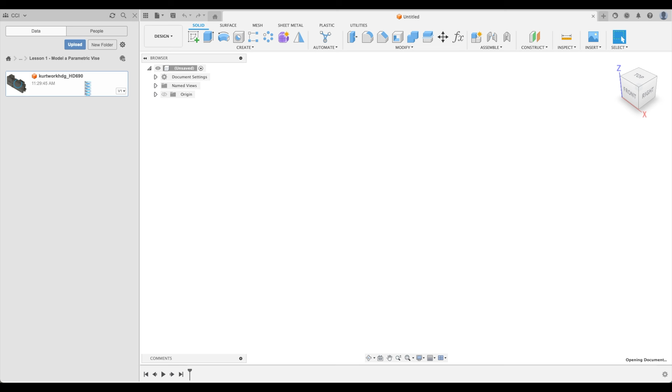So now that our vise has been uploaded, we have opened it. We can see that it is bare bones. Here is our vise—there's no texture, there's no appearance, and actually the orientation is wrong as well. Don't worry about that, we're going to address all of those in a little bit.

One thing you should pay special attention to: with our main assembly, if we right click, make sure to not capture design history. This is fundamental whenever we upload a file and do a ton of work to it, especially a vise like this—we actually don't want to capture the design history. Why not? Well, picture all the different adjustments we're going to make to this vise. If in the future we want to use it in a different program, a different file, a different setup, we would have a timeline with so many different types of adjustments to it. We would input that timeline into our new file and it would just get more complicated. It would actually chew up more of your processing power as well.

So we want to mitigate that. We want to keep as few items as possible in our timeline, and one way to do that is to not capture the design history. The next thing you'll notice is that all of our parts for our vise are located in the subassembly right here. And there we have it—everything is right there. Let me just rotate our vise.

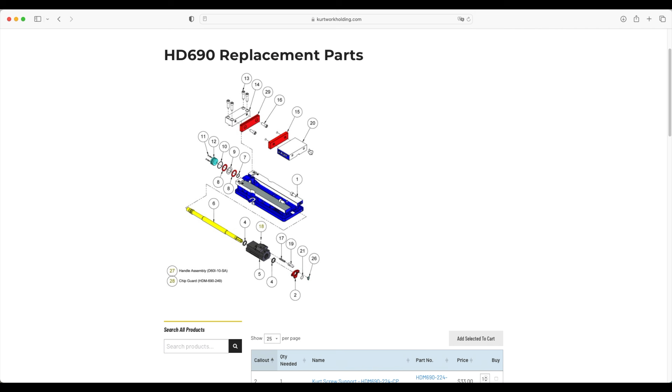Now we're actually going to have 2 more parts. What are they? We're going to have the 3 main ones, and then just our jaws, 15 and 29, which are our jaw plate and our groove lock jaw plate. Why are we going to have these jaws off to the side? Well, in the future, we might want to use aluminum jaws, or some other type of jaw system that comes from Kurt. So we're going to put those as their own individual components that we can easily adjust, change, or hide in the future. So total, we will have 3 main and 2 sub.

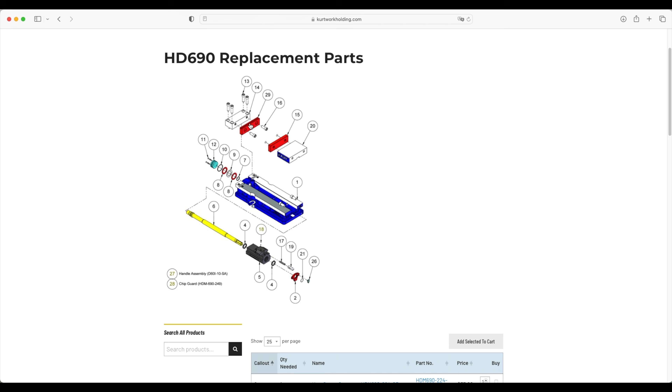So let's go back to Fusion. In our main assembly, we are going to create those components. New component - we're going to call this vise. The second component we will call stationary jaw. The last one will be our movable jaw. And then we will have our 2 individual jaws - new component, groove lock jaw plate, and jaw plate. So there we have it, 1, 2, 3, 4, 5. And then we have our master assembly, which now we are going to adjust.

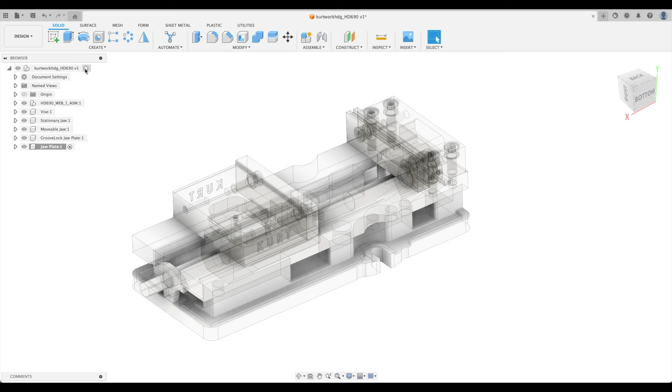So let's go back to our main assembly here and activate that. We'll expand our contents of our subassembly of the vise itself. Now, one thing with Kurt I've noticed is an error - they've actually given us 2 groove lock jaw plates. As we click on one, we can see it here. Let's hide it. And then we have another jaw right up here. So we actually have 2 jaws in one.

So let's delete the second one. We don't need that. And we'll take this first one and drag it into our groove lock jaw plate. There we go. Let's do the same thing with our jaw plate over here. We're going to drag it right down there. Let's hide those both now.

Great. So now let's look at our stationary jaw. Here we have the stationary jaw and 6 socket head cap screws. Let's find them and bring them over into our stationary jaw assembly. A little secret here - once we move it, we can hide our stationary jaw component and it will hide it on our screen as well.

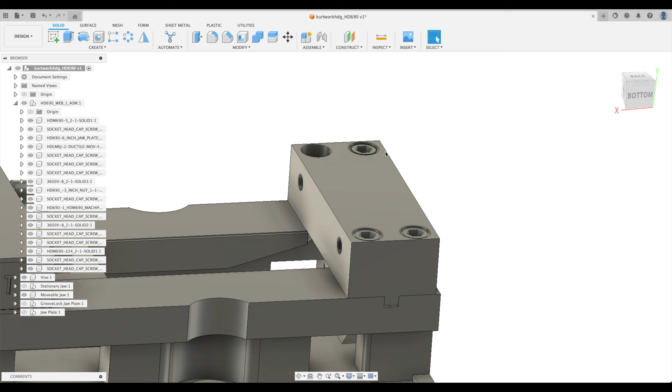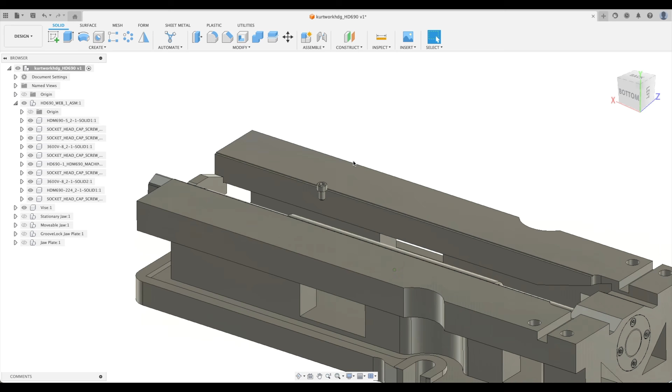And then our stationary jaw itself - let's move that into there. Perfect. Let's do the same thing with our movable jaw. This little screw that's left over, it's hidden. We don't really care about it, so we're just going to delete it.

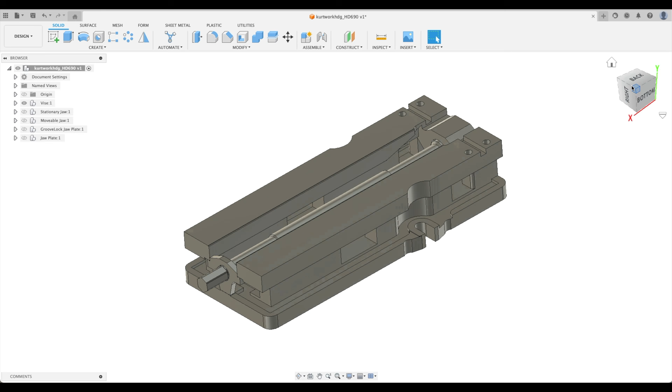Now, everything else that we see here is all going to be part of the vise assembly. So let's just grab all of that and drag and drop into vise. And we can delete that main assembly that came with the file from Kurt. Great. So now we can view our stationary jaw, our movable jaw, our groove jaw plate, and our jaw plate.

So before we go on to doing our parametric modeling, we have to join these bodies together. Let's just take a look at our stationary jaw, for instance. Here we have how many different bodies? We have 7. And if we open up our assembly, there they are. Well, we would like to combine all of these into one body, and the reason for that is we want to keep our future part as simple as possible.

When we import our vise into any future operations or any different files or projects, we want to have them inserted as quickly as possible. We want it to have an easy load on our processor, and we want to have things simple. And we don't need to have all these bodies as well. Remember, we're trying to keep this as simple as possible.

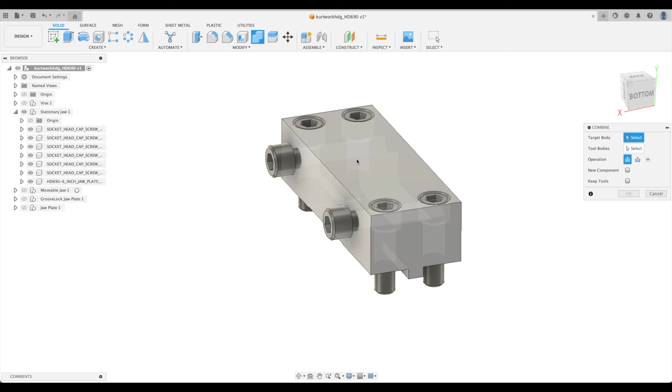So let's combine everything. We're going to combine our target body with all of our tool bodies. Go OK. Now we should only have one body right here. We can drag that and drop it into our main component, stationary jaw, and then delete everything else. So our stationary jaw is here now, and it is actually only one body. That's perfect. Let's hide that.

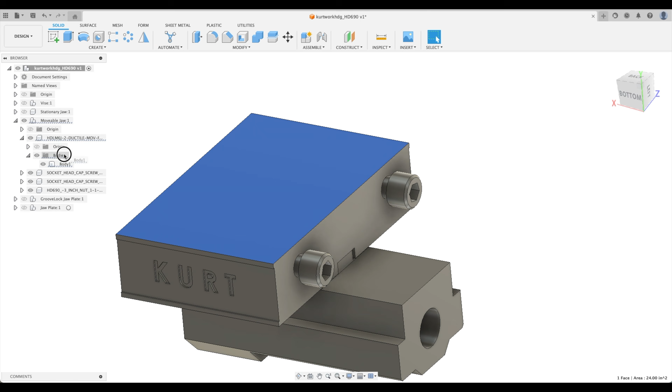Let's do the same thing for our movable jaw. Again, we are going to combine as one body, and then we're going to click on our body that we want to keep. And there it is right there. We can follow the dotted lines to where we find it, drag and drop it into our main component, and then delete all those subcomponents which have no bodies in them. Remember, we've combined them already. There we go. So now our movable jaw is only one component.

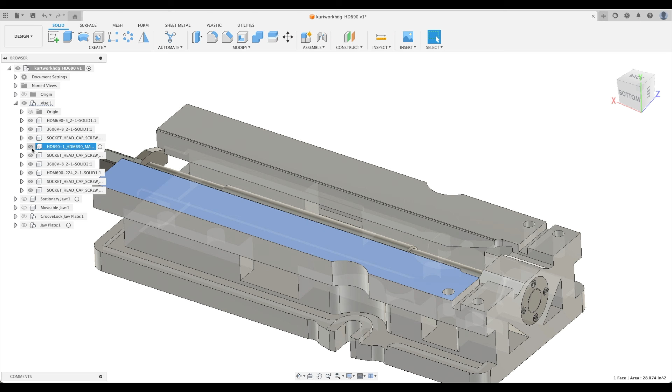Let's do the same thing with our vise now. So this is a little bit more complicated, but let's just take it one step at a time. Let's hide our main vise right there, and then we'll start joining everything together here. Let's do that - combine. Can do that. Now we can combine this as well and hide it at this point.

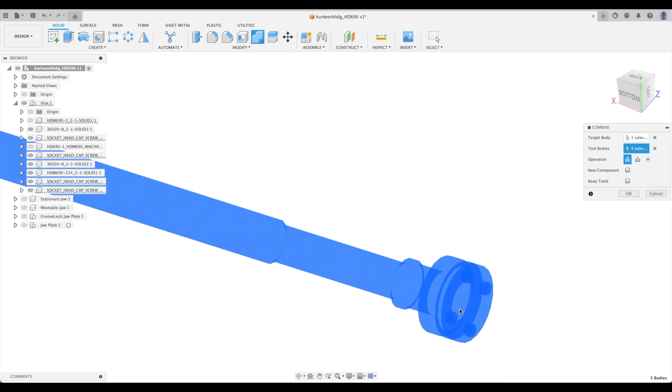Select our screws. We can even delete the screws if we want—they don't really have to be there in our part file. And then this actually does not join to our part right here, and the reason is there's a little bit of room in between those two components.

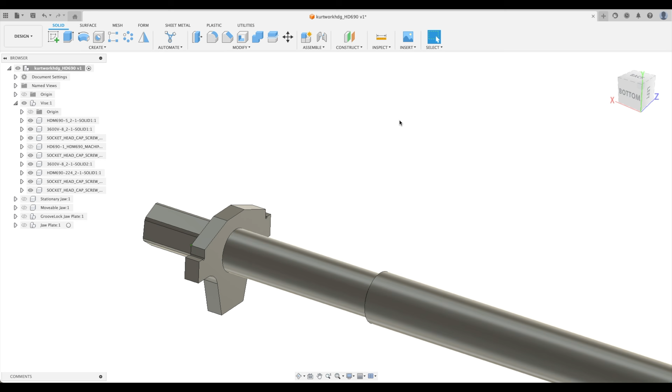Let's make our main vise active, and now we can combine our target body with our tool as well. So now everything should be under this one body right there, and we can drag and drop it into the vise and delete everything else.

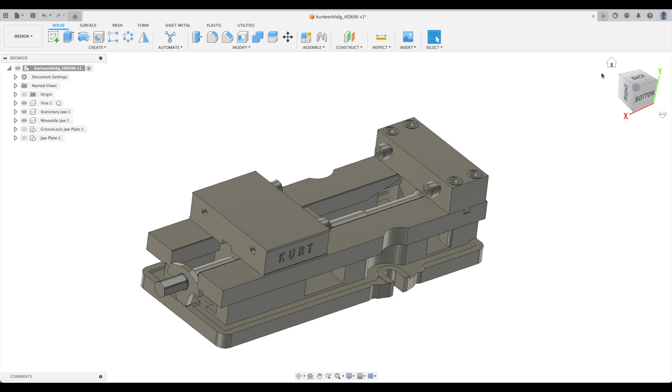Perfect. So now everything under vise only has one body. Everything under stationary jaw has only one body, and everything under movable jaw only has one body. So now we can move on to parametric modeling.

We're going to go up to our master assembly here and capture design history. Now our timeline shows up on the bottom. So the first thing that we're going to do is orient our vise. How can we do that? Well, let's just join it. We're going to click on that, go to our origin. There we go, and rotate it.

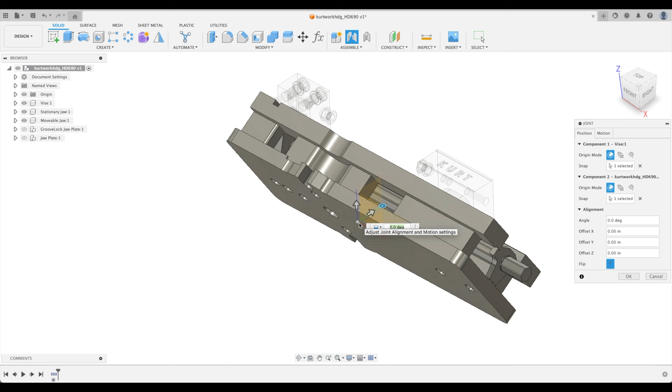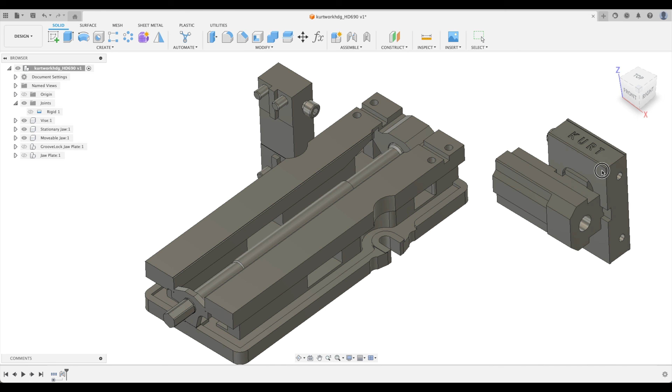I'm going to rotate it 90 degrees. This is going to be the direction that I am going to—when I insert this vise into a project, it will orient it just like you see on the screen. So let's go OK, and we can hide that origin and the joint. Now we have our stationary and our movable jaw. We have our vise, which we can't move—that is locked, that is joined to our origin. And then we have our GrooveLock jaw plate and our jaw plate right there.

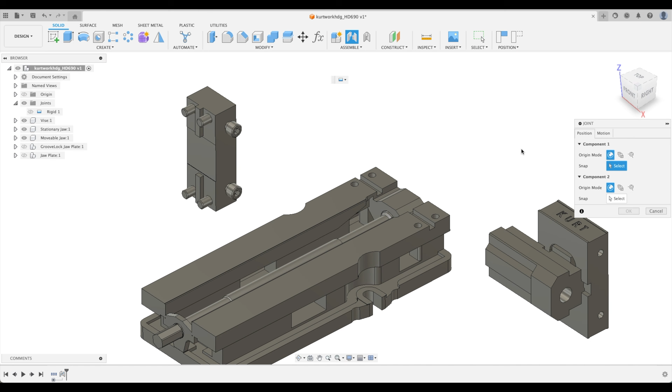So let's first of all join our stationary jaw to our vise. How can we do that? Remember with joints that the rule applies this way: this to that, this to that. So we want to move this, which is our stationary jaw, to that, which is our vise. We don't want to select our vise and move it to our stationary jaw—that would move everything over and fix it to this orientation. No, we want to move the stationary jaw to our vise.

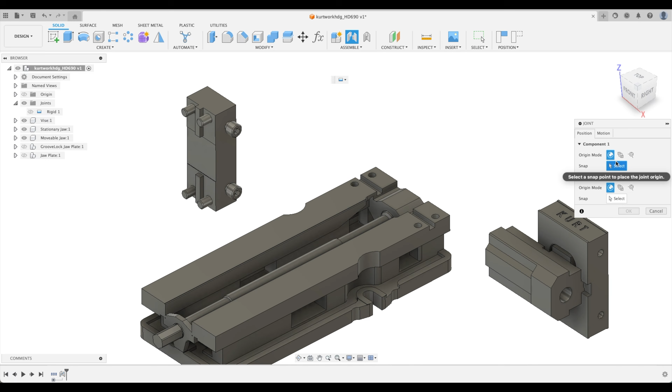So best way to do this, let's pick between two faces, and we are going to select this face and that face, and then we're going to snap it to this point right there. Now we're going to select our component number 2 and do the exact same thing: 1, 2, and snap it right to there. So now we just have to adjust our angle—we're going to go to 0. There we go, our stationary jaw is now in place, and we can hide that joint as well.

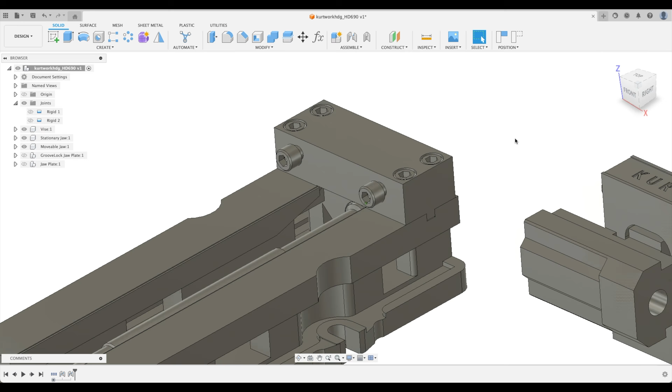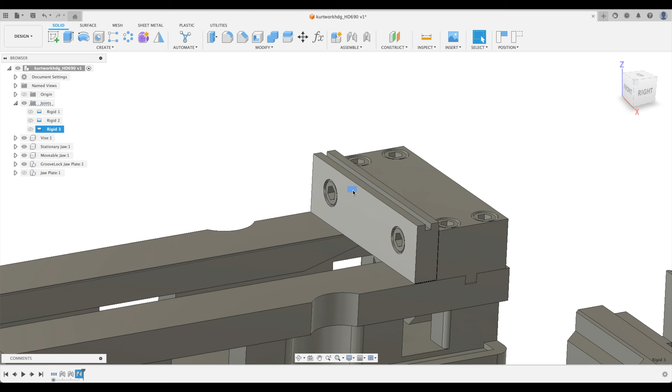The shortcut is select the joint and press V. Great, now let's put our groove lock jaw plate there as well. So we can join this as a rigid joint. Perfect, there we have it. We can hide that joint as well. Now next, let's put our jaw plate and join it to our movable jaw.

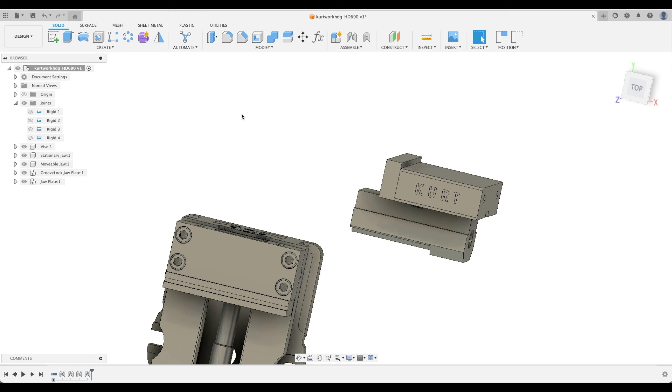Perfect. Now we can join everything together. So let's hide that joint there, and we can join the bottom of that jaw to the bottom of this, rotate it to 180, and it should be perfect. There we have it. So now our vise is completely constrained, it's assembled.

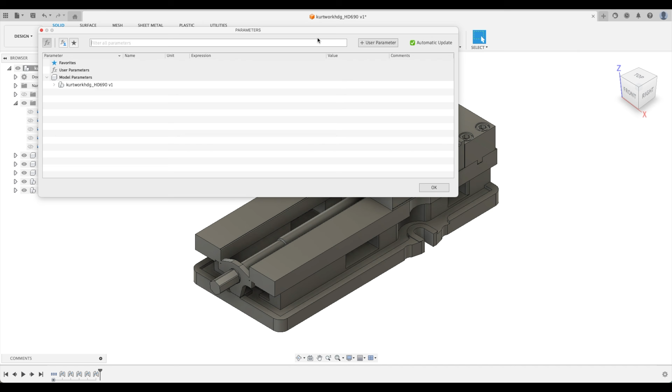Now we can do our parametric modeling. So for our parametric modeling, we're going to open up our parameters, and let's create a bunch of parameters here. So we're going to have stock X, and let's just make up a random dimension—this will be adjusted according to what your stock will be in future projects. So let's just say it's going to be 6 inches, and we'll get a better understanding in a little bit of what this actually means. So enter. Let's create stock Y, and let's do 4 inches. And let's do another one, stock Z, and we'll call this 2 inches.

Great, now we're also going to have an offset value. So the stock is going to be centered right in the center of our jaws, but say we want to move our stock over to one side or to the other. So let's just call this stock offset, and we're going to put it at—let's go 1 inch right now. This will change in the future. And then one last thing we're going to do is we're going to create parallels. So we're going to call it parallel depth, and usually they're 1/8 of an inch. Let's call it parallel thickness.

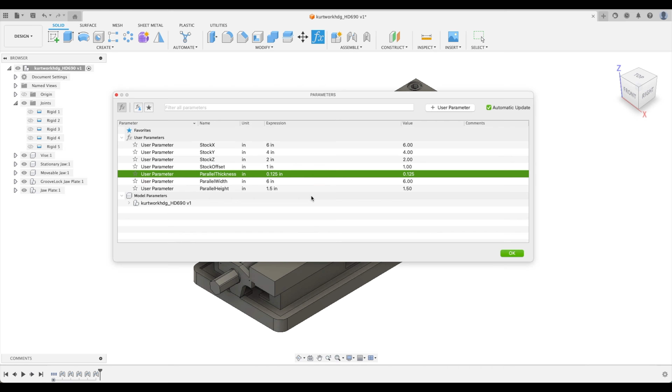And then parallel width. Standard parallels are 6 inches wide. And then we're going to do parallel height. Let's stick with 1.5 inches right now. So you should have all of these parameters before we proceed, so give yourself an opportunity to pause and input these parameters into your system.

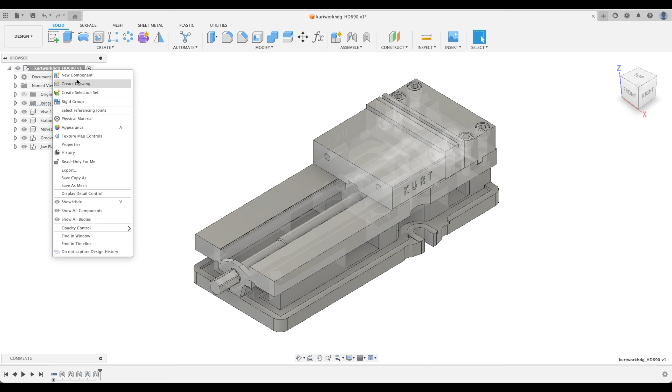So what do we need to create right now? We need to actually create 2 more components. One component is going to be our stock, and the second component is going to be our parallels.

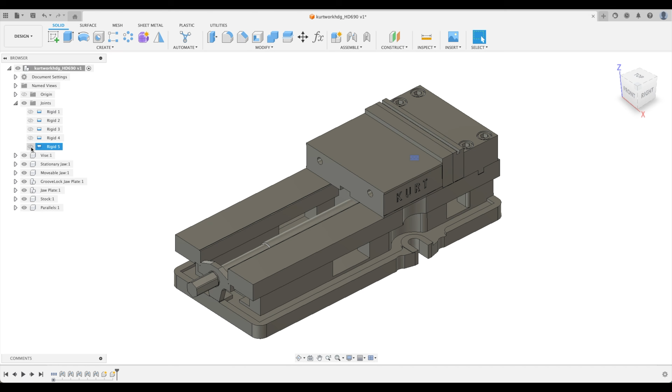So let's go back, activate our main assembly. One thing we want to do right now is find our joint that we just created to join those two together, and we're going to adjust this here.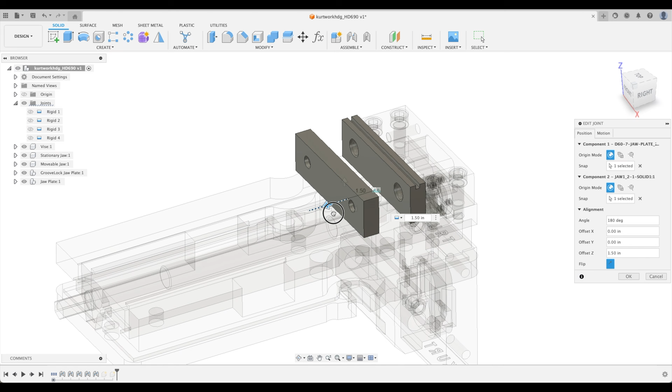We can change our motion if we want to slider, but rigid is just fine enough. So let's go position. Now this is one thing that we're going to change. Our stock is going to fit in between our 2 jaws here, so this has to be a parameter, and we're going to call this stock Y. Great, let's hide that.

Now we actually have to create our parallels as well, so let's do that. We can hide everything else, and let's create our parallels. We can just do that with a simple box function.

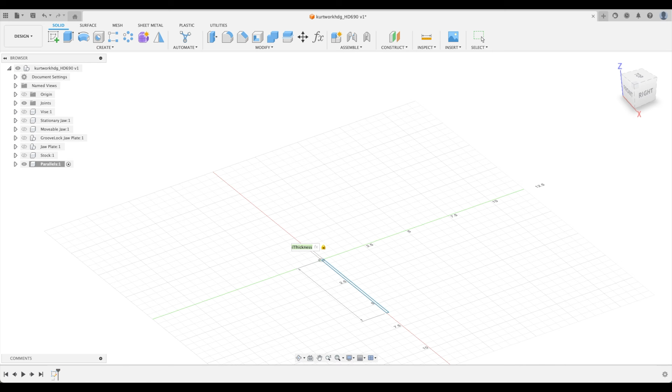And here we're going to go parallel thickness and parallel width, followed by parallel height. Now instead of a new body, let's create a new component. This will create a subcomponent in our assembly because we're going to have 2 parallels there.

And then we're going to right click, copy, and paste. These two parallels are going to be exactly the same. And we can go to our parameters and change our parallel thickness. Sometimes we'll use 1/4 inch.

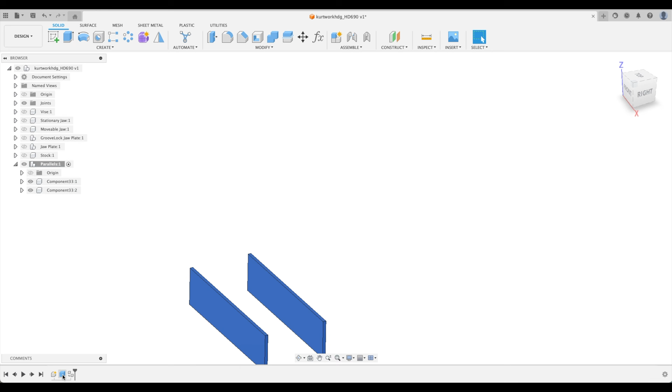Oh, so it didn't do it. Why not? Width. Oh, that's why. We have to do parallel thickness. There we go. And parallel width. Perfect. Okay, so now let's just see parallel thickness.

If we change it to 125, there we go. Our width, say we have 8-inch parallels. Yep, perfect. And our height, 2 inches. Okay, so everything is parametric there.

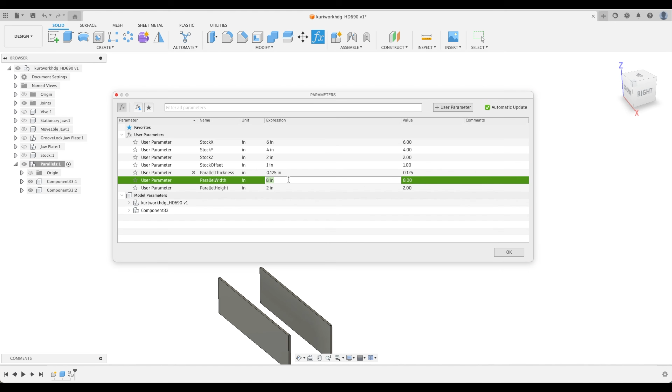Let's keep it at 125. Our width is going to be back at 6 inches, and our height, let's go to 1.5. Perfect. Now let's bring back our assembly.

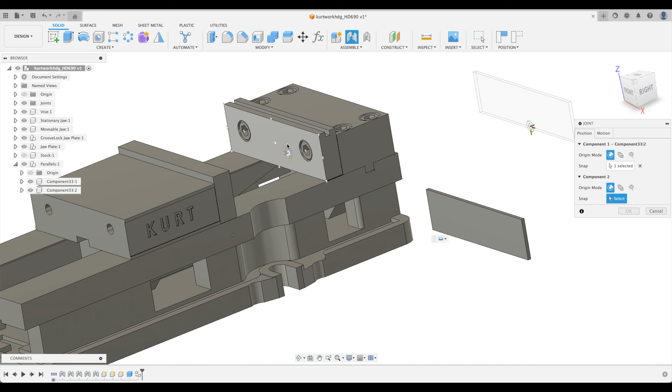We can move our parallels off to the side, and we're going to join them here as well. So let's joint our first parallel to our jaw. Okay, and do the exact same thing over here. There we have it, so our parallels are in place.

Now, as a little hint here too, we can go to our joints and we can rename this. So we could call this parallel to fixed or stationary jaw. Great, and then this one as well: parallel to movable jaw. Great.

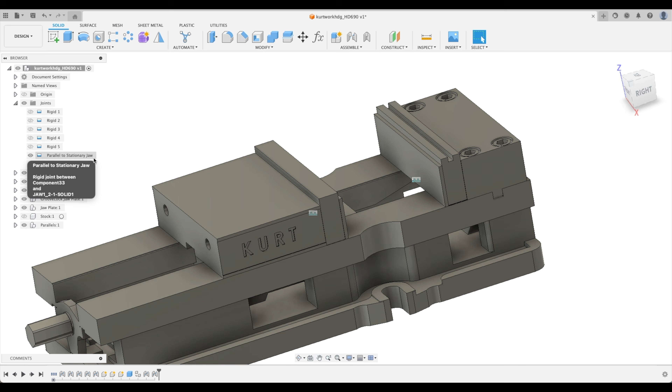That just gives us a little bit of organization in the future if we need to change something. So one last thing that we're going to have to create is our stock.

So let's go there. Stock. We're going to hide everything else too. We can actually go right click and go isolate. There we go. So let's do the same thing. We can create a box.

And here we're going to have stock Y, stock X, and stock Z.

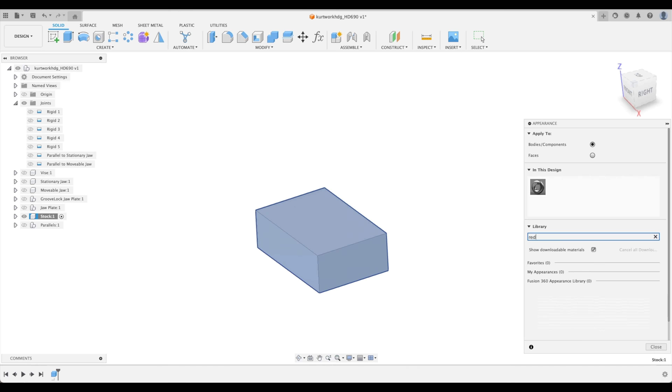Perfect. So for the stock, I like to go to appearance and change it to something that's red. Let's go red here and pick aluminum anodized. And then what helps too, if we right click and go to opacity control at 50%.

Now our stock will look like this. And when we import it into future programs, you will see your part floating on the inside because the opacity control is at 50%. So let's go back now.

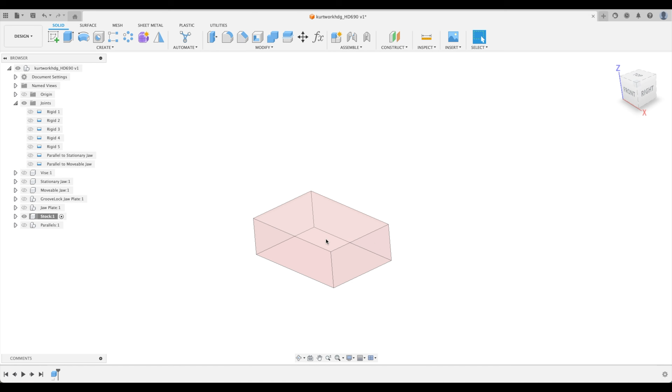We're going to go to activate or turn on, make everything else visible. Let's move our stock over here. Now let's join it over here to our jaw.

Now why don't we join it on top of our parallel? Well, that's a good question. If we were, and then say one day we weren't using any parallels, our parallel height would be 0. The parallel would disappear and our stock would not be able to find the joint location.

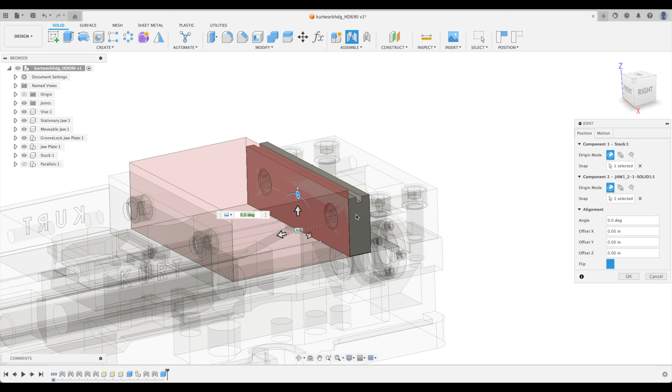So because our stationary jaw is fixed, it's best to select that to join with and then move this up in our parallel height direction. There we go, enter. Let's go back to our joint, and this will be our offset. So say we're going to move our part off to the right, well, we're going to put in our offset value right here.

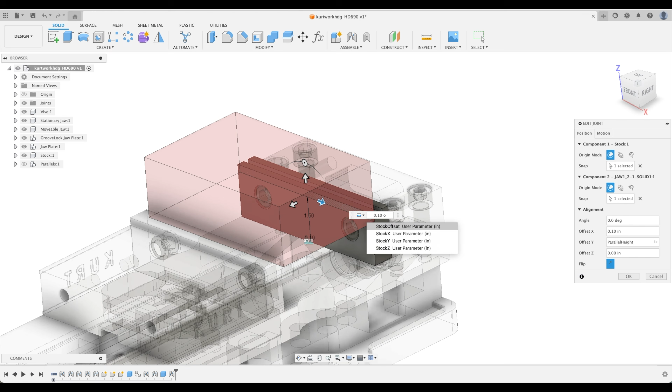Great. Let's hide our joint now. So let's see how this is parametric. Let's change our offset to 0, and now our stock will be centered.

Our stock Z, let's try a 4-inch height. Let's go to a 6-inch height. Perfect. Let's go down to a 1-inch height. I like it, 2-inch. Now what about our Y direction?

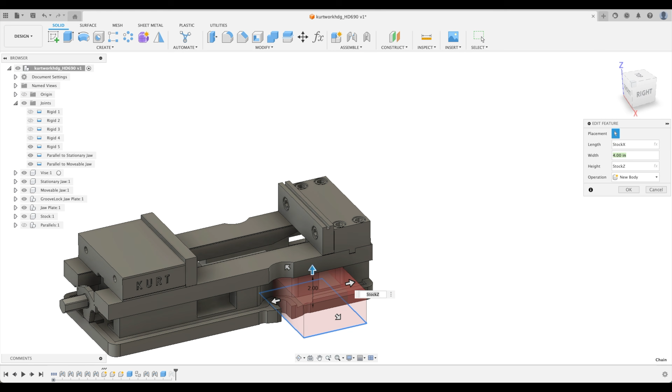Let's go to 8 inches. So our stock is not updated. Let's go back to our stock here. And for some reason, it doesn't seem to want to input the parameters there. So let's just call it stock. And this will be what direction? Stock Y. Nope, this is going to be stock X and stock Y.

There we go. Okay, so everything is going to update perfectly. Let's just prove it. Our stock Y, let's go to 2 inches. You can see that our jaws and the stock update automatically. Let's go to 4 inches now. Perfect. And then X, there we go. If we've got an 8-inch stock or a 10-inch stock. Perfect, there we go.

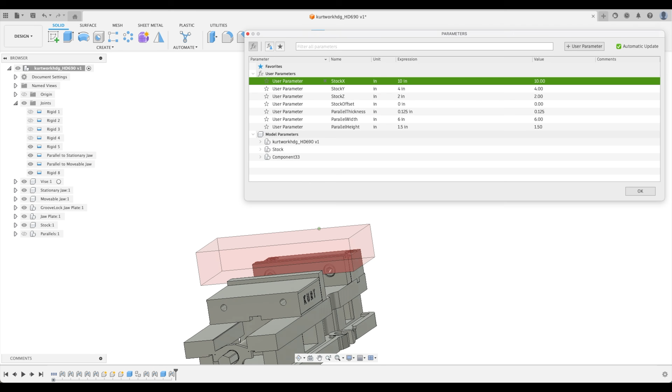So let's just go down to a standard dimension here. Let's go to 4 inches in X. Let's go 2 inches in Y and 1 inch in Z.

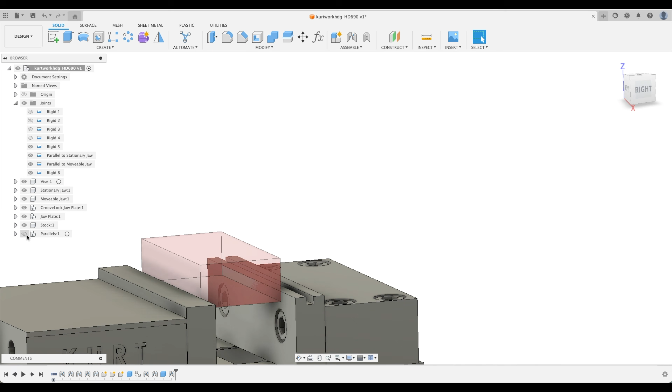And we can also check our parallel height to make sure. Oh, we can. Let's go OK first of all and turn on our parallels. There they are. And let's just change our parallel height to 1 inch. Everything moves correspondingly as well. Perfect. So I think 1 5/8 is the tallest parallels that we can put with this vise, and there it is, 1.625. So everything looks amazing.

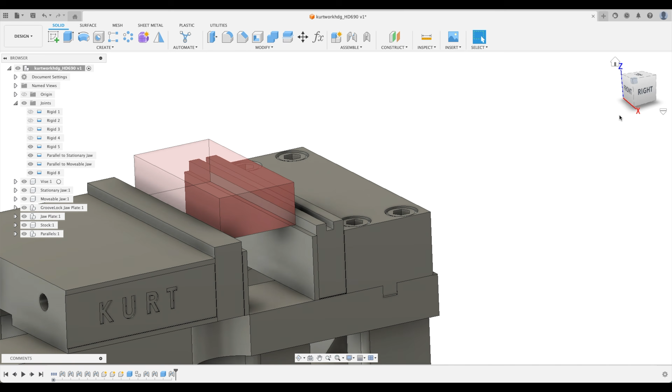Congratulations, you just finished doing a fully parametric modeled vise with stock and parallels. Let's save our part.

If you would like to give your vise a nicer look, well, we can add some appearances to it and some textures as well. So let's hide our stock first of all. Let's just take it one step at a time. Our parallels, for example, well, what kind of appearance should we include with this?

So we right click on our parallel, go to appearance, and let's type in steel. And usually this is polished. Although we're not using stainless steel, we're just going for the look right here. We could go steel satin if we want. I kind of like the stainless steel polished, so let's bring that in.

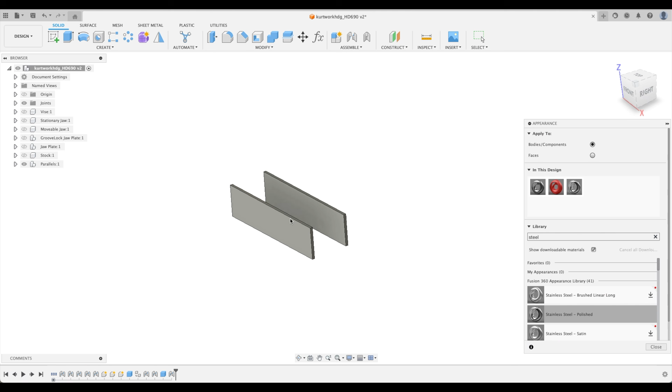It automatically updates both of them because they're the copy. The second parallel is a copy of the first. Perfect. So our parallels are now stainless, polished stainless appearance.

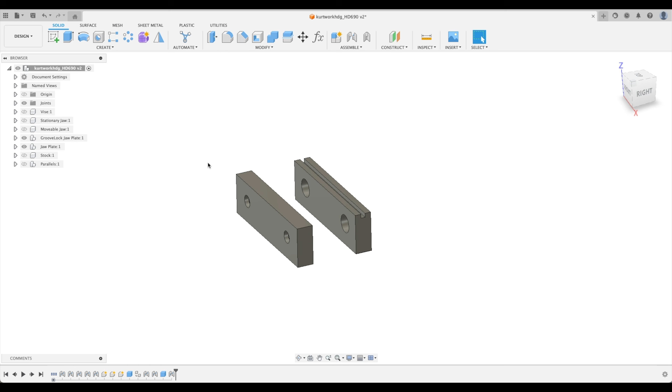The stock we're not going to change, we like that. Let's go to the groove plate as well. So generally these are hardened and ground. So let's go to our appearance as well. And I personally, well, let's keep it with the stainless steel polished. There we go. Okay, perfect.

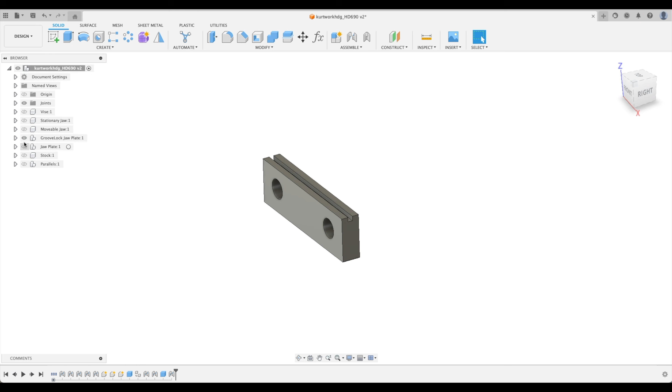Let's hide that now. Let's go to our movable jaw. So what does our movable jaw look like? Well, let's go to Kurt workholding one more time. And we can look at our vise right here. So we've got cast iron and we've got some blue paint.

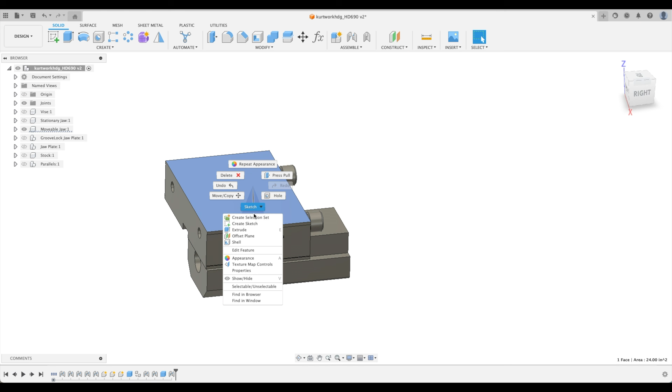So let's go there. And we are going to right click appearance and let's type in cast iron. There we go. So steel cast iron, cast iron. So this is what we like. Let's apply it to the entire body. Perfect, there we go. So now we've got this nice cast iron look.

Now we want to change our bolts to black oxide. So a little secret here is we can just select all of that, click on faces, and type in black. Coating black oxide, there we go. So all of that should update as black oxide.

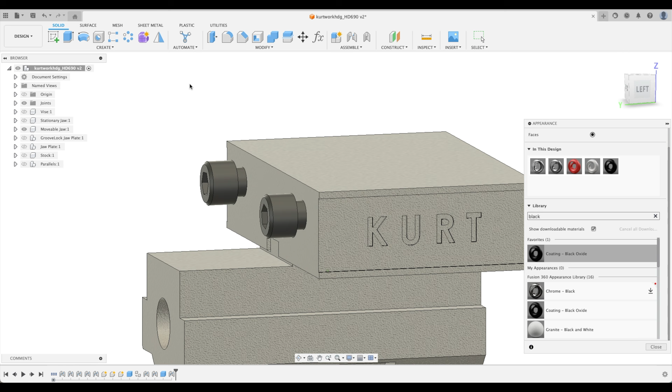Now, what else do we have? We have this nice blue paint with white characters. So let's do that. Let's find, first of all, I want to save coating black oxide. Oh, we've got it under favorites already. So let's go to blue.

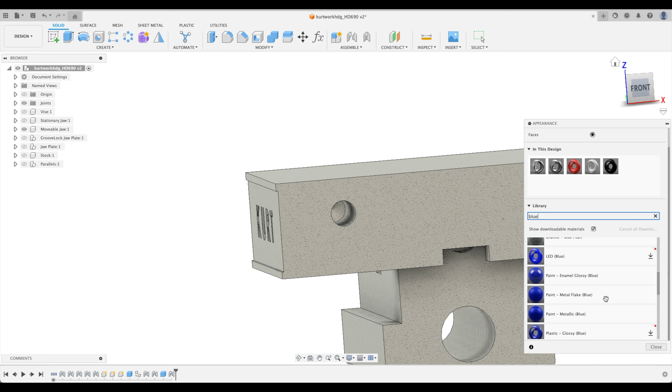And we can find blue paint right here. Let's go metal flake. That looks pretty good. So same thing again, we're going to pick all those faces just like that. We have faces selected up there. Metal flake, let's drag and drop.

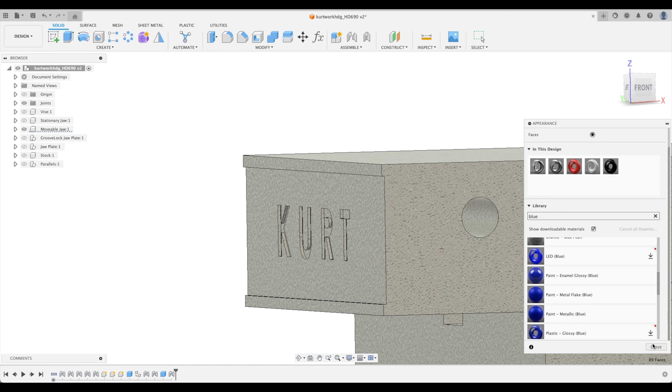Oh, it's not working. Okay, so we just have to go back in time. Repeat appearance, front, select faces first. There we go. Blue. We're going to go blue metal flake. And we should be able to... Oh, yes, we don't want to do the letters quite yet.

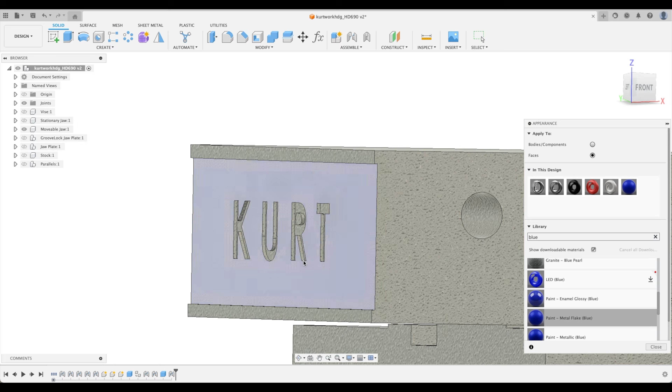That's right. Okay, now we want to do white letters on the inside. So let's bring up white here.

Okay, and we can find... let's go powder coat. That's probably the best option.

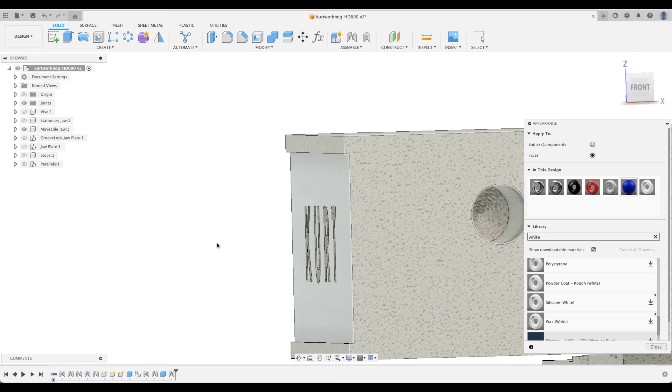So again, we're going to select those faces, and let's just drag and drop right there. Everything should be white. Oh, and we just have to make that blue again. Perfect. Let's do the same thing on the other side.

So let's first of all do our selection. The reason why I'm selecting from left to right is because if we go from the other side and go right to left, it will select everything - that's the dotted line window. We don't like that, so we're going to go left to right, which selects only the things in our window.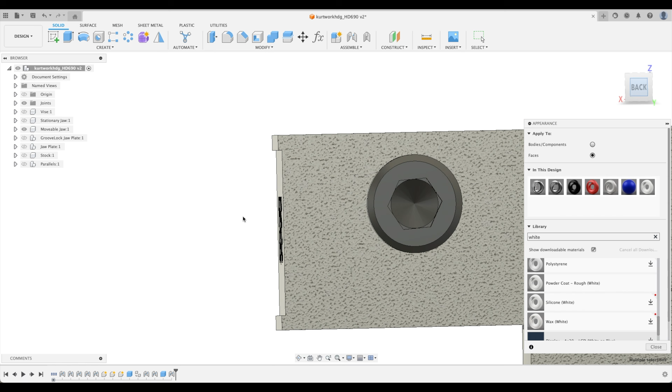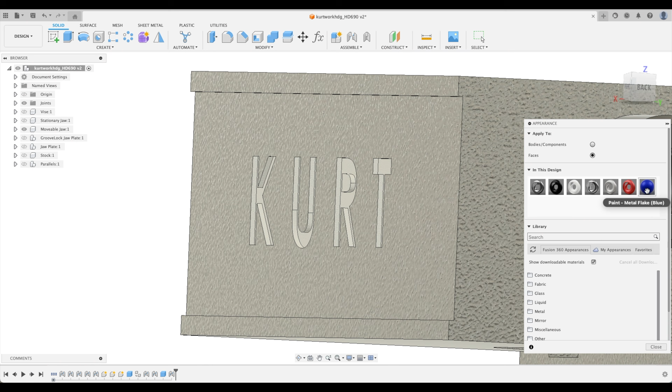So let's do that one more time. There we go. Oh, it doesn't seem to be working, so just close, reset appearance, faces, back. There we go. We're going to input our white. Great. Blue now, and blue right there.

Okay, so what do you think? This is looking pretty good. Let's go close. Okay, let's save that.

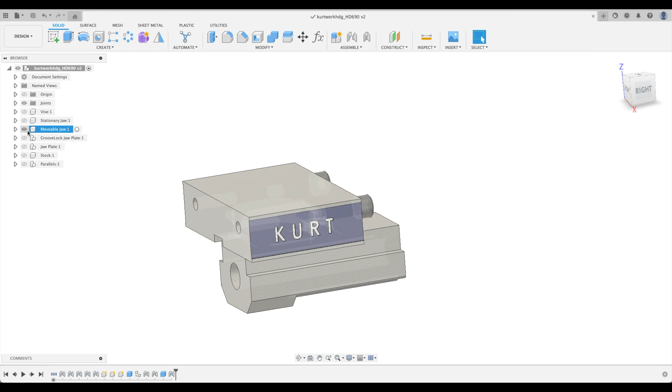So our movable jaw is done. Let's go to our stationary jaw and do the exact same thing. We're going to right click, repeat appearance, and let's pick our cast iron. There we go.

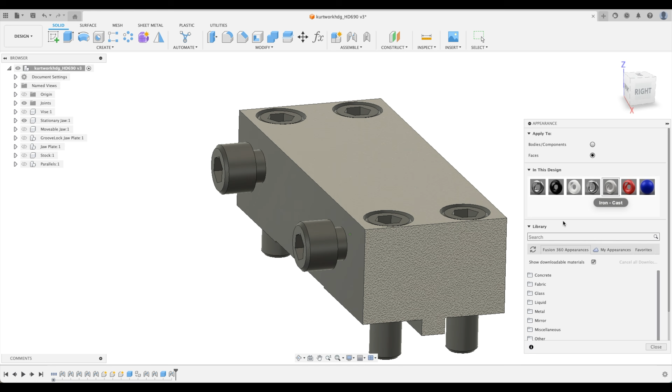Actually at this point, what might be easier is if we make everything black oxide, and then for our faces, just put in our cast iron like that. Perfect. And again, I guess we can leave that as black - we don't really care about the bottom. Nobody will be seeing that. Perfect. So now our stationary jaw is done.

Now we're going to move on to the complicated vise. So let's go back to our Kurt website. And we can see most of it is blue except for our main top. So let's do that. I would probably say that using blue is probably going to be the fastest right now.

So let's do that. Appearance. We're going to make everything blue. And then go back to our faces and let's adjust a couple things here. Let's do our cast for these faces.

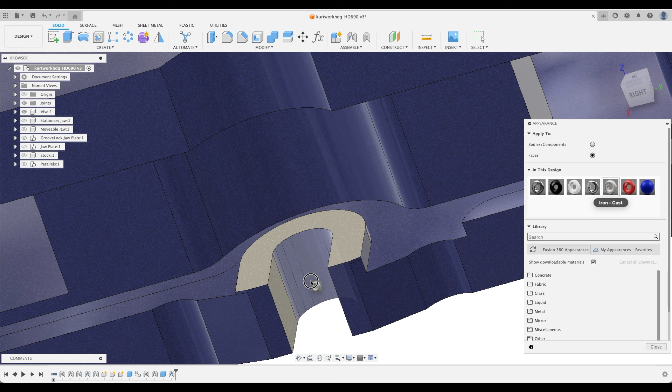Perfect. We'll go on over here and do the same thing. And then our faces up here, we'll use the stainless steel polished as well. Let's do that. Again, no one's going to see those holes as well.

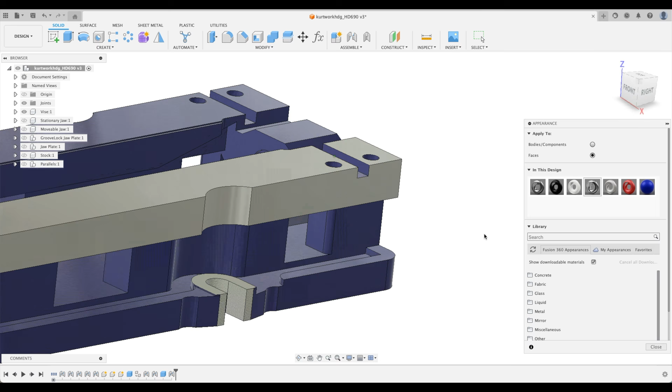Great. And the inside here, we're just going to do the main faces. Remember, it doesn't need to be perfect - this is just for a little bit of decorating, you might say. Okay, so there we go.

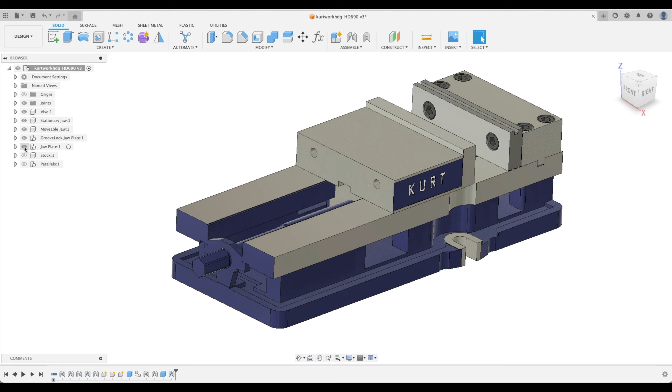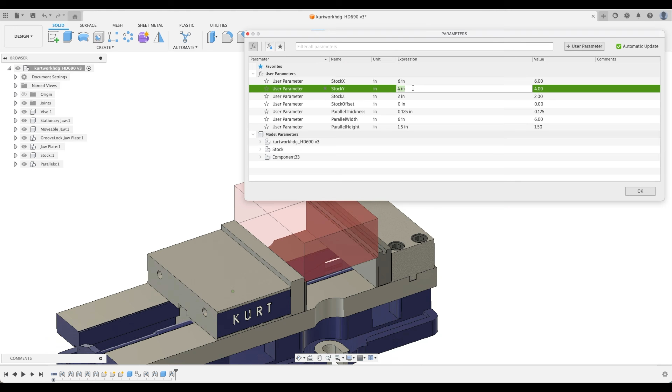Our vise is completely finished right now. So let's just see our parametric modeling one more time. Our stock, 6 inches. Our Y, let's go 4. Our Z, 2 inches. Great. Our vise completely changes there. Great. And our parallel height, 1 inch.

So that's working great. Let's turn it to 0 and see what happens. Great. So our parallels end up having an error, but our stock goes all the way to the bottom, which is like what we want. We can always hide our parallels at that point. Perfect. So our parallel height now, let's go back up to 1.

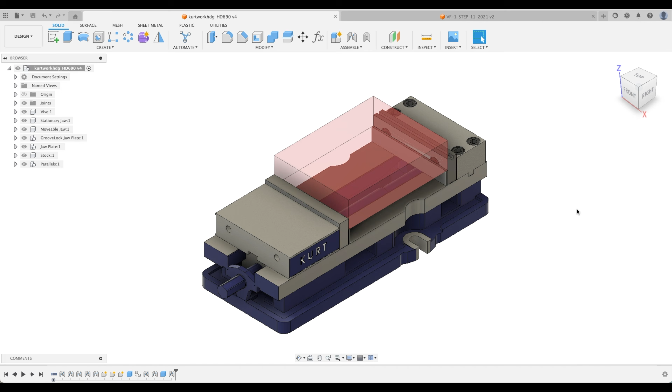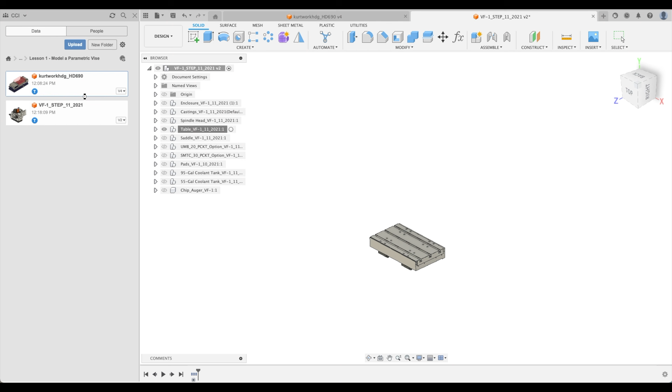To show you how we can utilize this with an actual machine part file, we can bring up our machine. Let's just hide everything. We'll just keep our table here, isolate. There we go. We'll go to our data panel and insert into current design. There we go. We can just orient this a little bit. Perfect. Let's join it now.

Great, there we go. Okay, and then to use the parametric feature of this vise, we have to go to our vise here, right click and break link. Why? Well, if we go up to our parameters, you'll see no parameters right there. So we have to break the link. Now we can go to our parameters and everything is there.

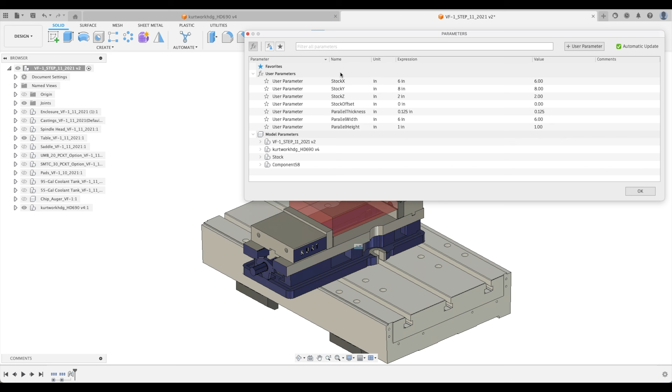So we can adjust it to our part, whatever our part size is. Our vise and our stock will adapt accordingly.